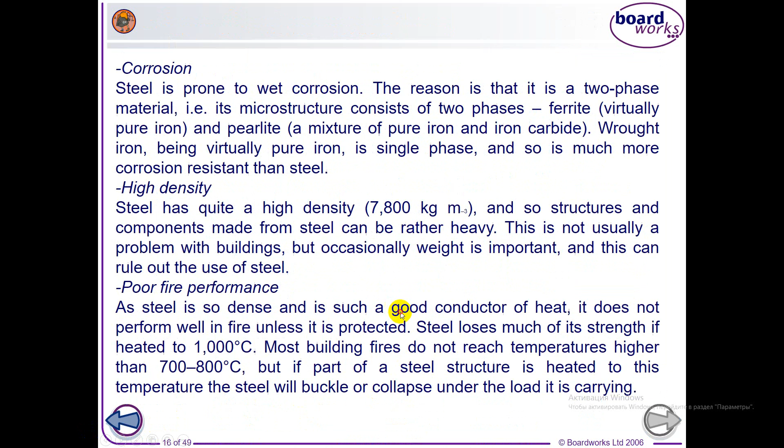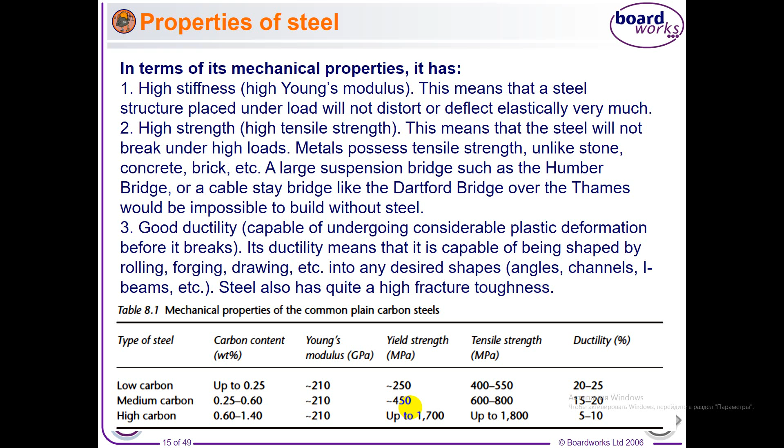It's available in abundance, relatively easy to fabricate, and most importantly, very economical. As a result, it's the exclusive choice for structural application in civil engineering. Young's modulus stiffness remains the same for all the steel samples, irrespective of carbon content.

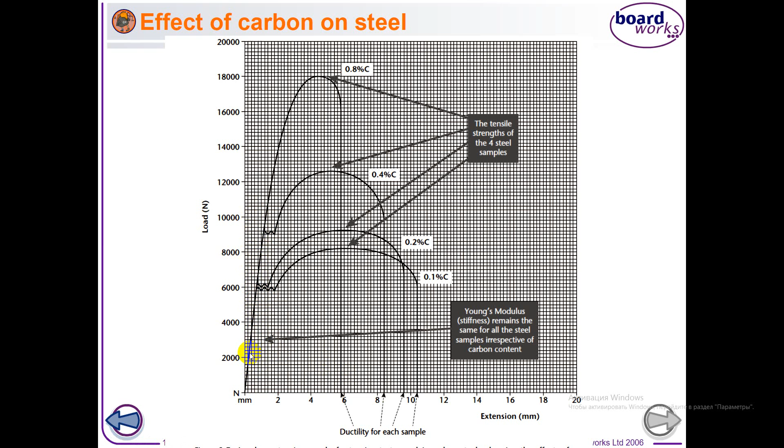Environmental implications of steel. A major benefit of steel is its recyclability. It's a relatively easy metal to recycle in a way which requires little energy. The sustainability of steel and other materials is dealt with in greater detail later. In general, the average life cycle of a building is around 60 years. And here you can see the typical life cycle of an office building.

Over the 60-year cycle, when it comes to environmental considerations, the most important parts are the embodied energy at the beginning, including extraction, manufacture, and construction, and the end of life, including demolition, disposal, reuse and recycling.

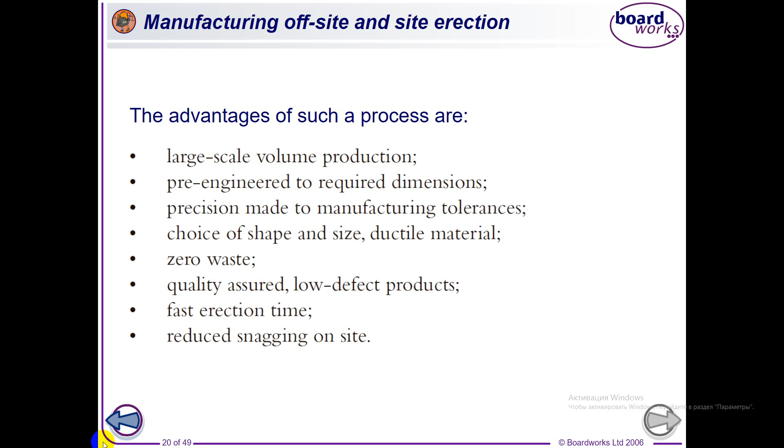We already have seen the life cycle of steel in civil engineering applications. In theory, all steel used should be either recycled or reused, which is a huge environmental and economic advantage. Currently in the UK, for example, at least 85% of steel used in construction is reused or recycled. Furthermore, 99% of structural applications are recycled or reused, and only 1% of structural steel is lost to landfill or rust.

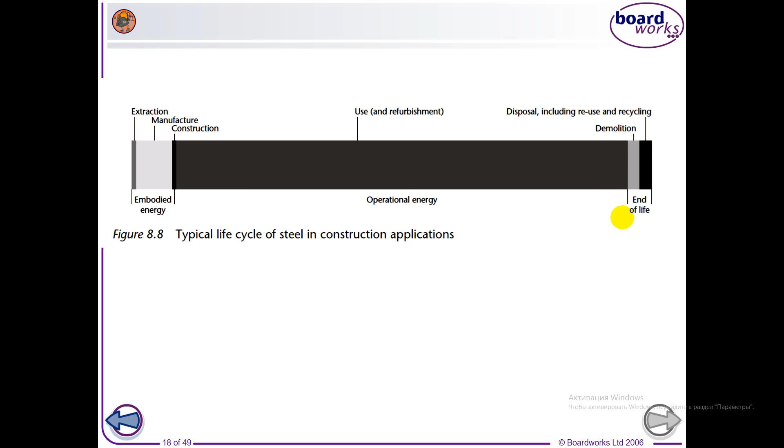So here you can see the typical life cycle for steel used in civil engineering applications, showing how sustainable the material is. From raw material supply, then steel production and manufacture of steel construction products, then pre-construction scrap or use in a construction project. Then after use in the construction project, end of life and/or reuse for a new project or refurbishment, or post-construction scrap, and then steel production is repeated and the whole cycle repeats.

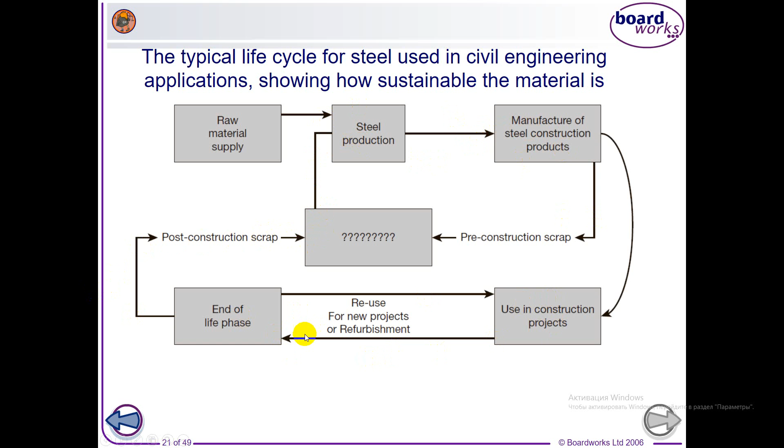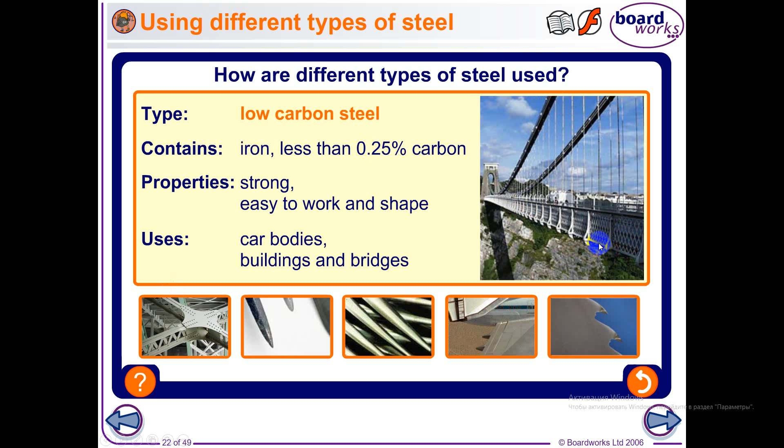Here you can see some examples of different types of steel and how they are used. For example, low carbon steel contains iron and less than 0.25% carbon; properties: strong, easy to work and shape; uses: car bodies, buildings and bridges. The next type, high carbon steel, contains iron and more than 0.5% carbon; very strong, brittle and hard to shape. Uses: tools, knives and snowboards.

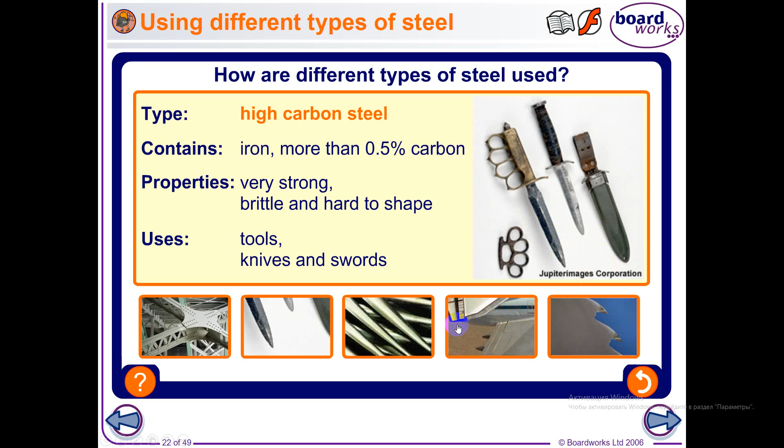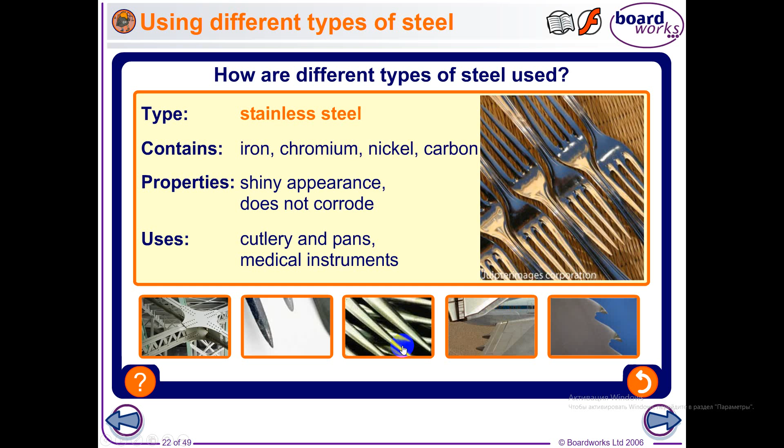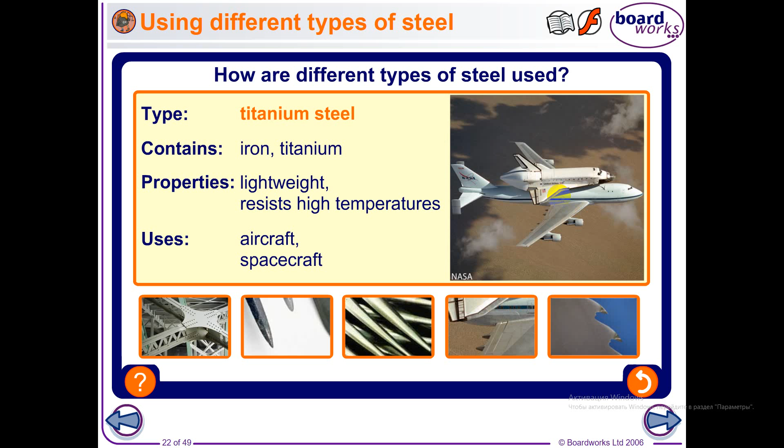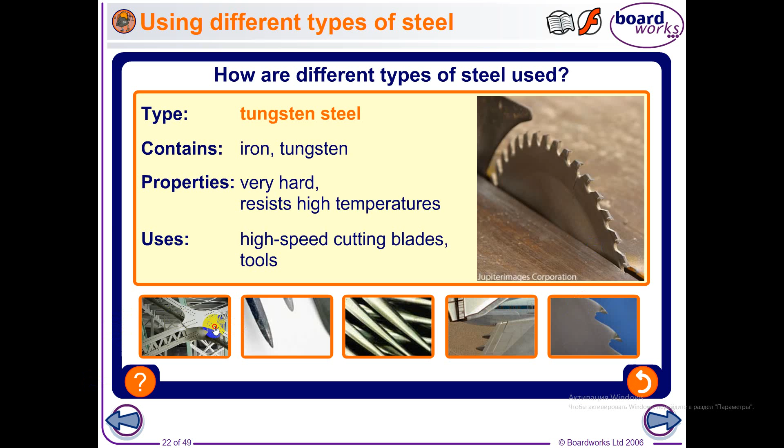The next type we already know: stainless steel contains iron, chromium, nickel and carbon. Its properties: shiny appearance, doesn't corrode, and uses: cutlery, pans, medical instruments. Titanium steel contains iron and titanium, is lightweight, resists high temperature, and is used in aircraft and spacecraft. Tungsten steel contains iron and tungsten. It's very hard and resists high temperatures, used for high-speed cutting blades and tools. Alloying different combinations of elements creates different types of steel with an amazing range of properties and uses.

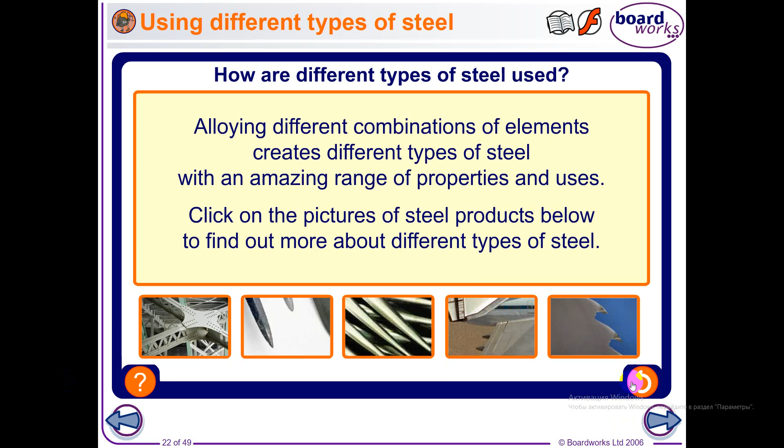Now the question: which type of steel is each item made from? Low carbon steel, of course, for the car body. High carbon steel for the sword blade. Tungsten steel for the rotary saw. Titanium steel for the airplane wing. And stainless steel for cutlery.

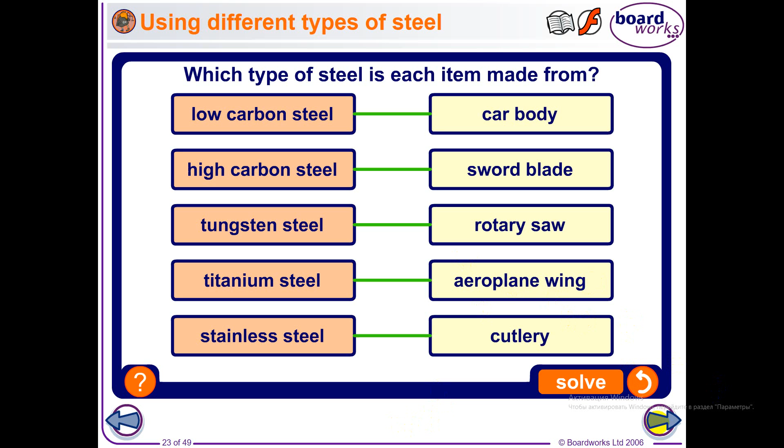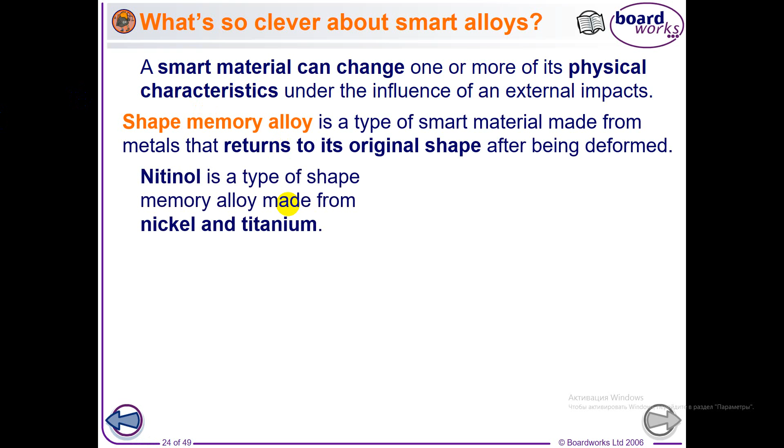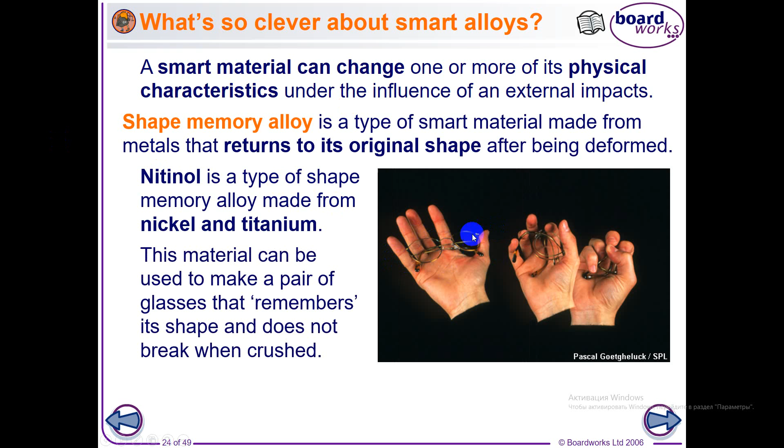And what's so clever about smart alloys? A smart material can change one or more of its physical characteristics under the influence of an external impact. Shape memory alloy is a type of smart material made from metals that returns to its original shape after being deformed. Nitinol is a type of shape memory alloy made from nickel and titanium. This material can be used to make a pair of glasses that remembers its shape and doesn't break when crushed.

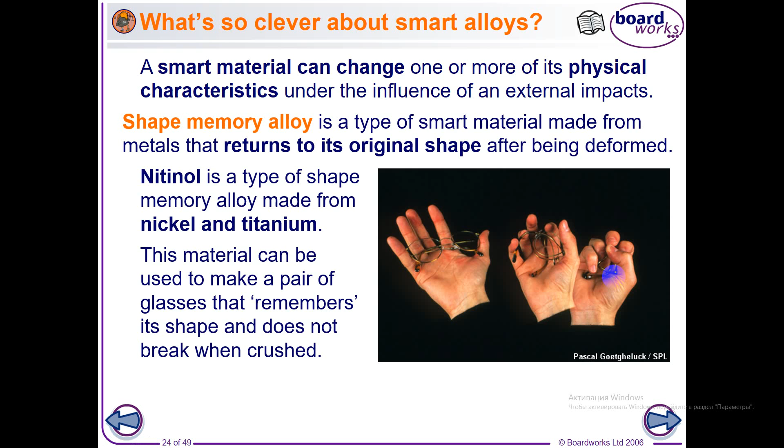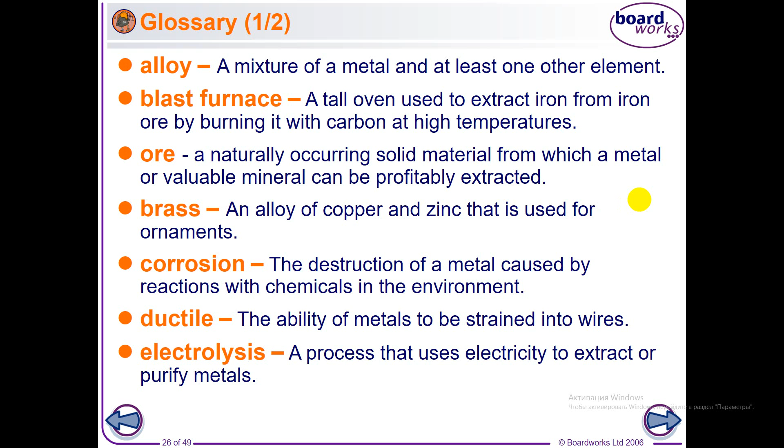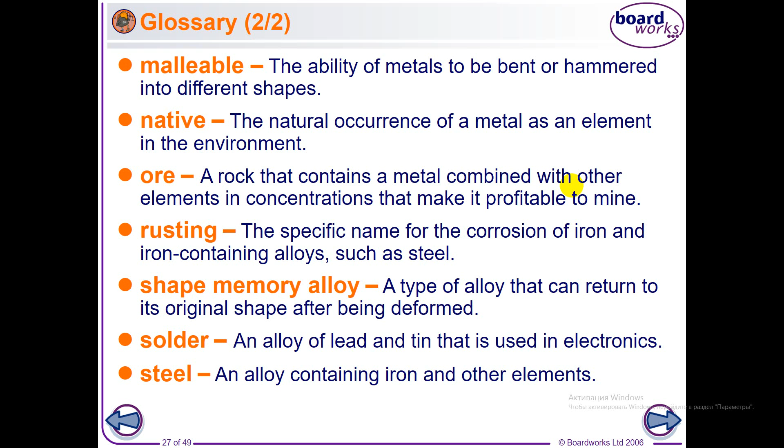Electrolysis: a process that uses electricity to extract or purify metals. Malleable: the ability of metals to be bent or hammered into different shapes. Native: the natural occurrence of a metal as an element in the environment. Ore: a rock that contains a metal combined with other elements in concentrations that make it profitable to mine. Rusting: the specific name for the corrosion of iron and iron-containing alloys, such as steel. Shape memory alloy: a type of alloy that can return to its original shape after being deformed. Solder: an alloy of lead and tin that is used in electronics. And steel, very easy: an alloy containing iron and other elements.